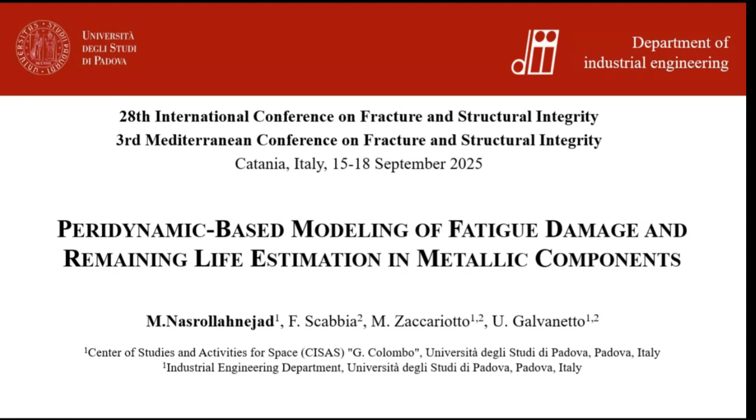Fatigue is the main source of failure in aircraft structures, with 55% of failures in aircraft components attributed to fatigue. There are several sources of high cycle fatigue damage in aircraft components: aerodynamic excitation, mechanical vibration, airfoil flutter, and acoustic fatigue. Therefore, fatigue analysis is key to aircraft safety and maintenance.

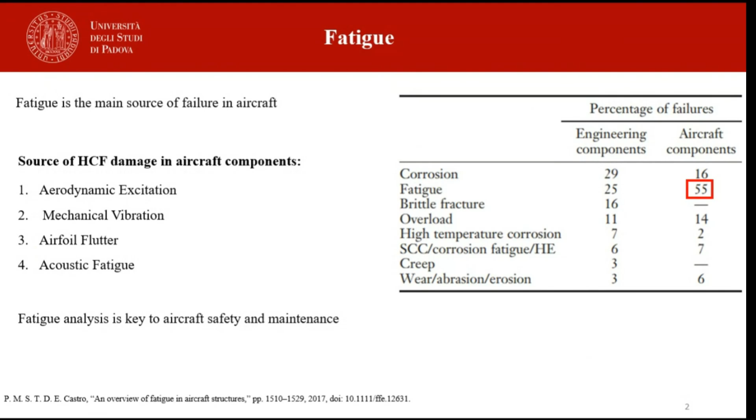Peridynamics is a non-local theory proposed by Silling to overcome limitations of classical continuum mechanics, especially for discontinuities. This theory is designed to cope with failure analysis since it employs integral equations rather than partial differential equations. With peridynamics, we can simulate crack initiation and propagation, which is one of its main advantages.

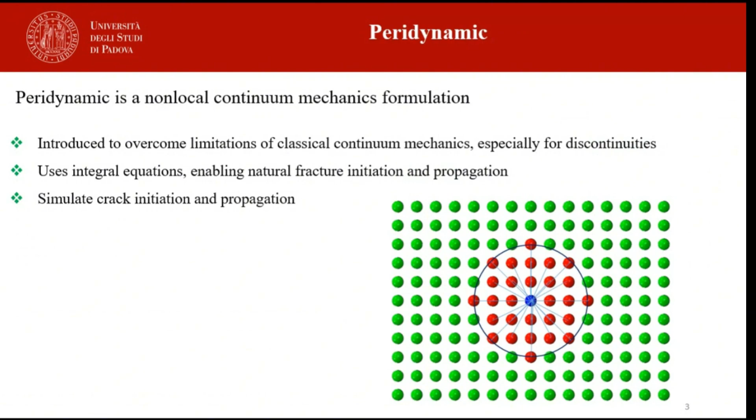The equation of motion in peridynamics takes the form where rho is mass density, u is the displacement vector, b is body force, f is the pairwise force function, and Hx is the neighborhood. The interaction between x and x prime is named the bond and is identified in the reference configuration.

In the displacement configuration, the displacement vector is described by this equation, and the pairwise force function is described by this equation, where C is the micromodulus, M is the unit vector, S is the bond stretch, and mu is a history dependent value. A bond breaks when the stretch value exceeds a critical value denoted by the critical stretch.

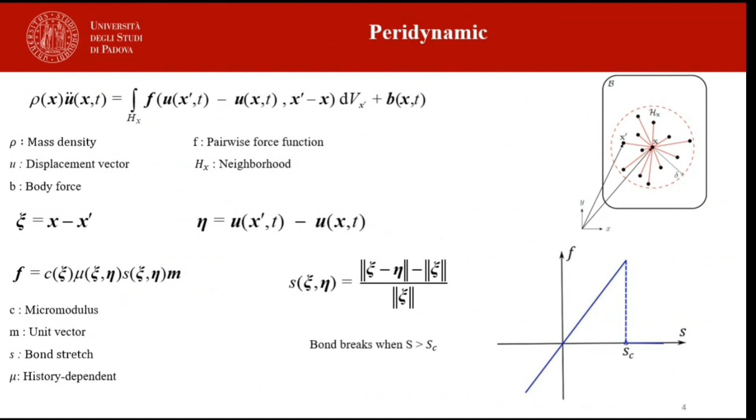Now let's look at the remaining life approach, which is used to describe how peridynamic bonds degrade over time. Each bond is characterized by the damage variable named remaining life, with an initial value. When materials undergo cyclic loading, the bond gradually degrades, and when lambda is equal to or less than 0, the bond breaks irreversibly.

Evolution of this parameter is described by the remaining life equation, where A and M are positive constants and epsilon is the cyclic bond strain. Stress ratio in peridynamics is defined as the minimum stress divided by the maximum stress, and local damage is the ratio of the total number of broken bonds to the initial bonds. When this value equals 0.4, it marks the transition from nucleation to propagation.

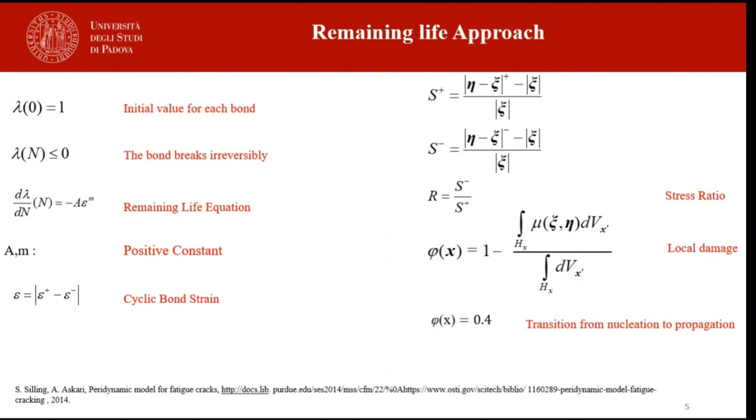In this work, we simulate only the crack initiation. In the nucleation phase, A and M parameters equal A1 and M1, and can be obtained from the SN data. From the slope of the logarithmic curve of number of cycles versus strain, we can calculate M1, and parameter A1 can be obtained from the intercept of this line with the strain axis.

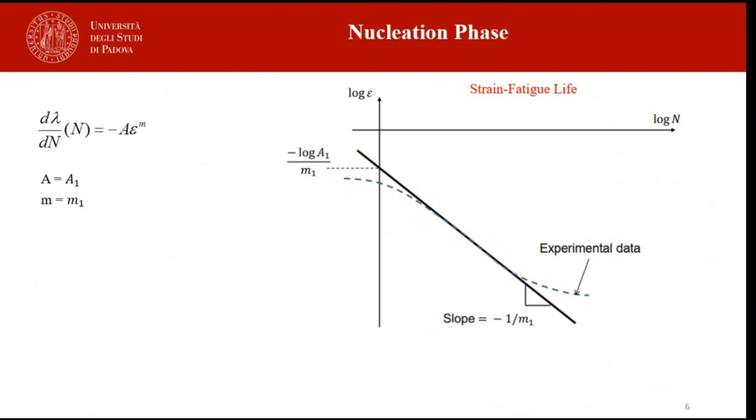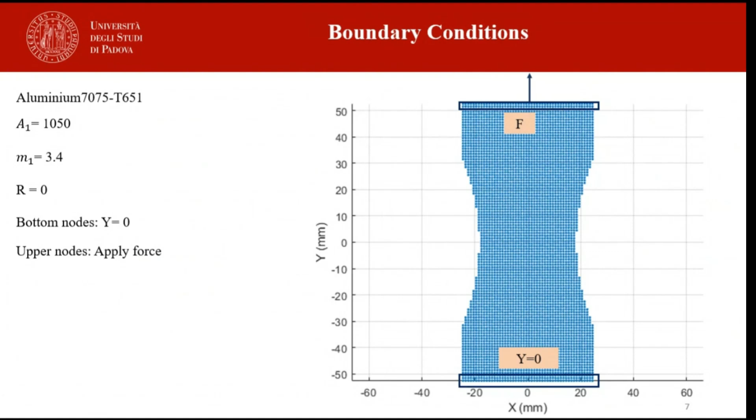Surface roughness is one of the detrimental factors that impact fatigue life. In this paper, they investigate the effect of maximum depth of surface roughness on fatigue behavior of materials in as-built condition. For this purpose, samples were fabricated using different laser power and laser speed to achieve various surface roughness.

After printing, samples undergo stress relief heat treatment to remove residual stress, ensuring that only the effect of surface roughness would be assessed. For scanning the surface, they use computed tomography for each specimen. The full surface of the gauge section is scanned and the deepest value of Sv is reported.

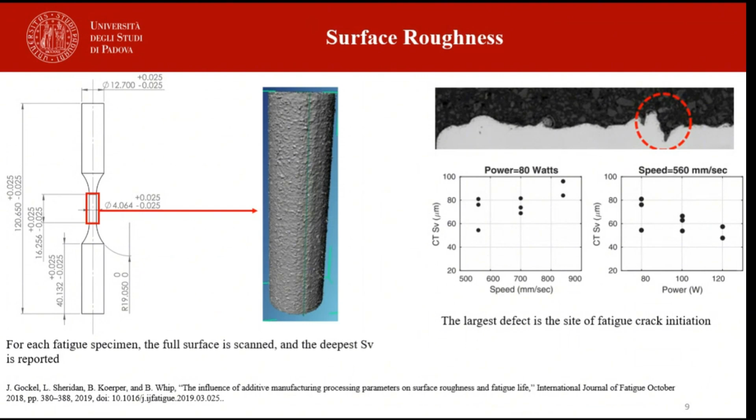In fracture mechanics, it is assumed that the largest defect is the site of crack initiation. For simulation, we create the initial value as described in the article. The article states that maximum stress is 900 megapascals, the material is Inconel 718, and the stress ratio is 0.1.

Because of the geometric symmetry, we create half of the specimen to reduce computational cost. We apply boundary conditions: fix the bottom node in the y direction, apply symmetric boundary conditions, and the upper node is subjected to cyclic loading.

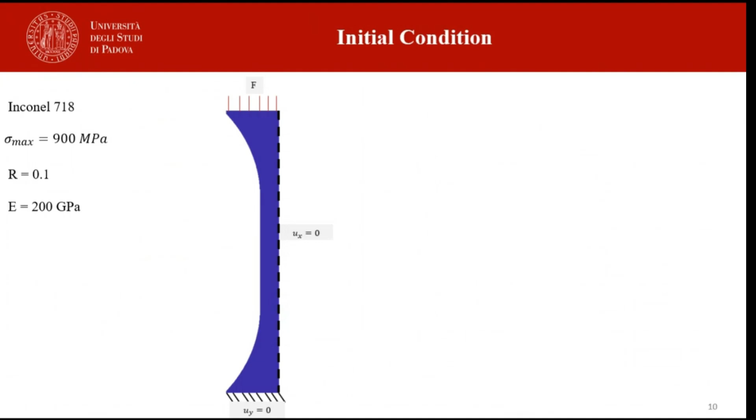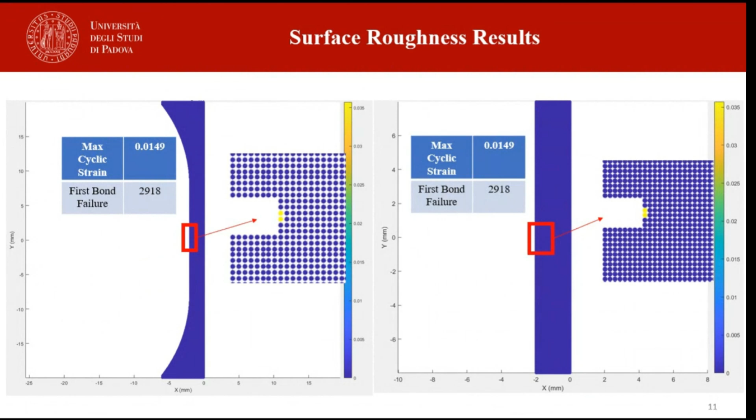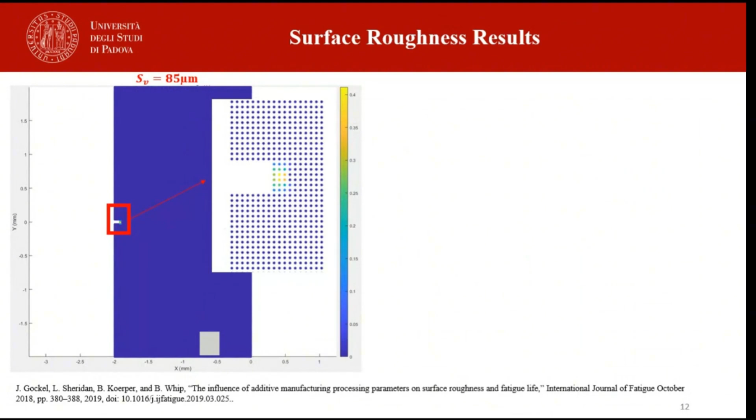This figure is the result for the case with a maximum depth of 85 micrometers. As we can see, the crack nucleates from the surface roughness sites, which is in strong agreement with the experimental results.

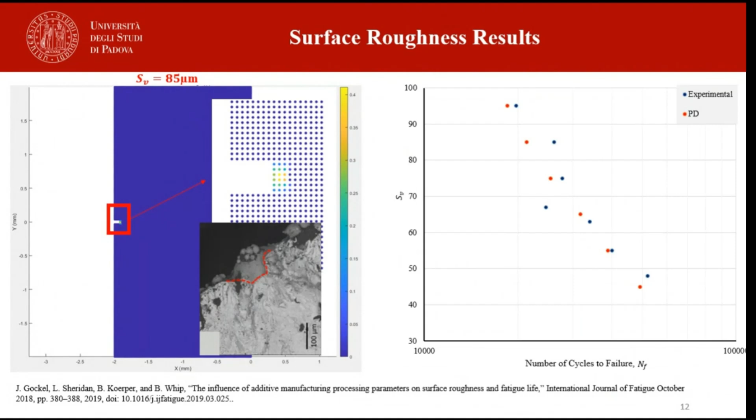This graph compares our results with experimental ones. The y-axis is the maximum depth of surface roughness, and the x-axis is the number of cycles to failure. As you can see, our peridynamic results are in good agreement with the experimental ones.

Porosity is another common defect in additive manufacturing parts that has significant impact on fatigue behavior. Here, we aim to investigate, in the presence of both defects—surface roughness and porosity—which one dominates over the other.

Experimental results show that the maximum diameter of spherical pores is almost 85 micrometers. So we choose the maximum diameter for porosity and the surface roughness, with a distance of 1 millimeter selected between them to avoid any influence on each other.

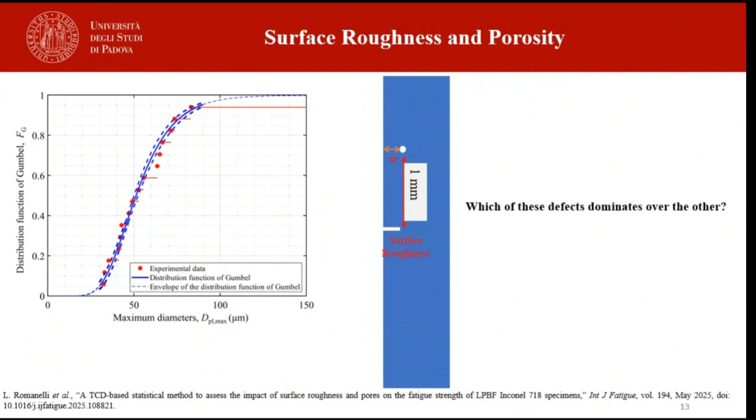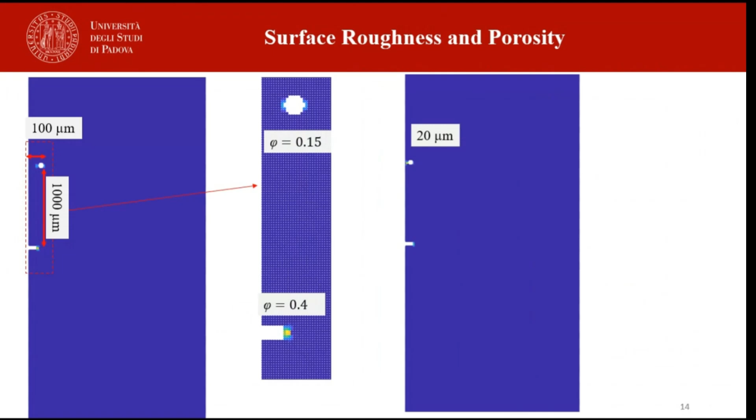When the pore is located at a distance of 100 micrometers from the free surface, cracks nucleate from both of them, but surface roughness dominates over porosity, meaning the crack here reaches the growth stage earlier. Until 20 micrometers, surface roughness dominates over porosity, but below 20 micrometers, porosity dominates over surface roughness.

Conclusion: experimental results confirm that maximum surface roughness depth in as-built materials plays a dominant role in reducing fatigue life. Our peridynamic framework successfully validates this finding, capturing defect-sensitive fatigue behavior. When both porosity and surface roughness defects are present in the samples, cracks can nucleate from either of them. However, surface roughness dominates over porosity, particularly when the pore-free surface distance is more than 20 micrometers.

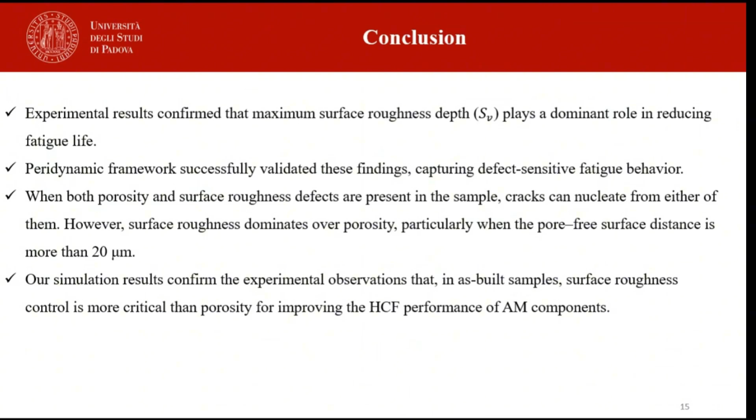Finally, our simulation results confirm the experimental observation that in as-built samples, surface roughness control is more critical than porosity for improving the high cycle fatigue performance of additive manufacturing parts.